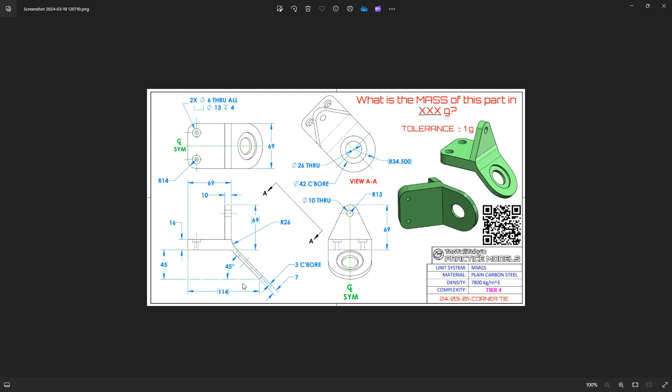This model is fairly simple for IronCAD just because of our positioning capabilities and some of our handle options. It basically consists of just a base piece here on the bottom, and then a vertical piece, and then an angle piece at 45. The tricky part on this one is really just to get this bottom point to be 114 from this location. So I'll show you how to do that in IronCAD, and let me move this over to the other side, and we'll go ahead and build this part.

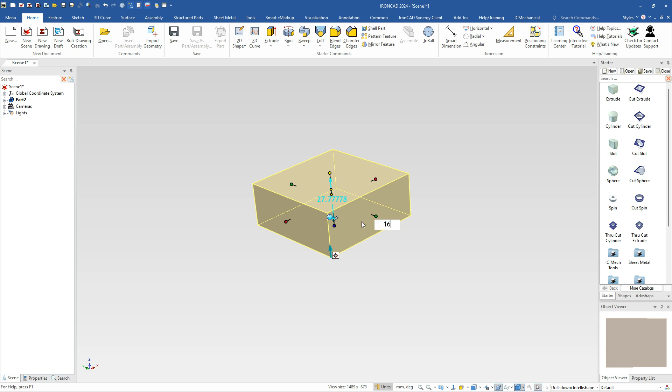Most of these can all be done with standard shapes in IronCAD and also some of our sketch shapes. So I'll show you how this is done. We'll just start with a block. This is going to be our base that I mentioned there, which is currently 69 by 69 by 16 thickness. So just type in those values, hit enter to go through each one of those quickly.

Next, we would have to draw this vertical piece, and this is best done with a sketch. You can do this in multiple ways. What I'm going to do is actually rotate over here, and I actually have multiple ways to do this. We can start a sketch, place it, draw it, position it, or whatever.

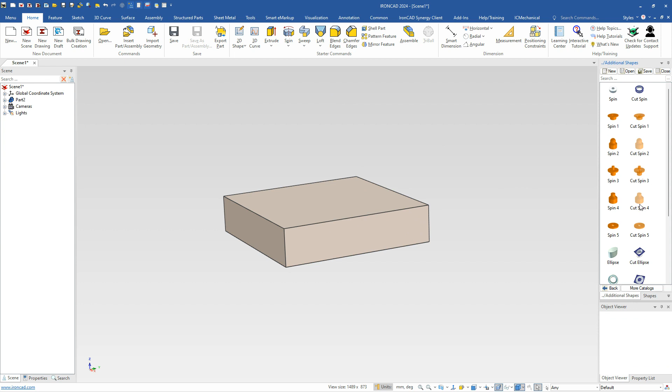But we do have these in our catalogs as well, which I haven't shown in some of my other videos. But if you go to our shapes catalog and under additional shapes, down at the bottom, you'll see two sketch shapes that can be drag and dropped out here as well. One is based on the corner, one's based on the center. So if you want to drop on the midpoint or if you want to drop on the corner, you can do that. Again, this is following our drag and drop capability, so what direction you're going, that it may drop in a different orientation.

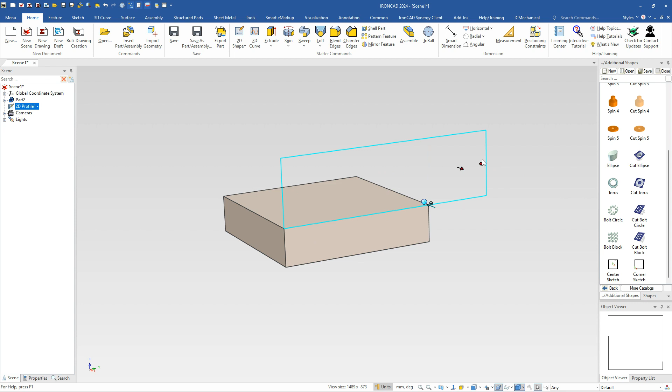But this one's fine. I can just either rotate it around using the tri-ball, or in our case, I can just pull this over. I want to snap there, grab this handle, and I'm going to snap there. So I realigned it to where I wanted it to be. And this, I'll hit the E key to edit the sketch.

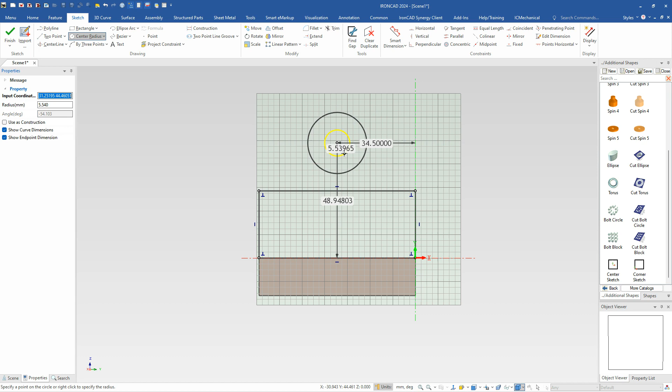In this case, we're just going to go ahead and draw a couple of cylinders out here, and this is going to be in the center of our sketch. And we're going to place this up here, and I'm going to right click and give that a value of, I believe that is 13 for that radius there. It also has a concentric one as well, and I'll just set that as a value of 5 for the radius inside there. And I'm going to set my constraints up, just FYI.

Under constraints, I have some default settings here that it's using, so it's building my constraints as I do this. Next, we can just delete this line, and we can simply just drag these lines up here until we get to the tangency on this guy. So we got a tangency there, and we got a tangency there, and we can just trim off this bottom piece. We could have also added some dimensions on here for constraints.

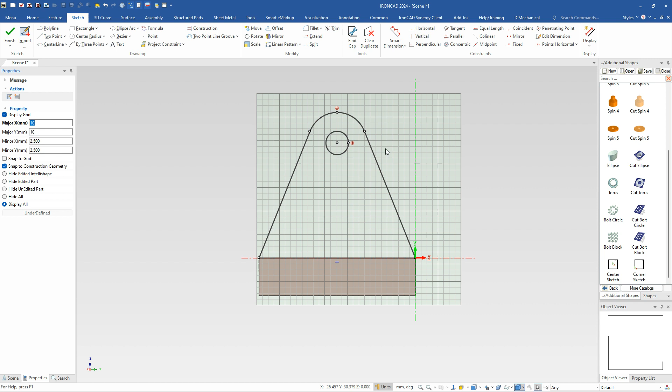So for example, if we wanted to actually have that constraint there, we can select those two lines and tell it to be tangent between those, or we can just use the tangent tool. Either way, I'm just box selecting those two, and it's making those tangent, and I'm going to go ahead and lock down this axis here to be this value to be 13 here.

We do want that to be set, because I'm going to pull this down because we have to set a height from the bottom. So we can either try to do a dimension here. I'll just show you another way because I'm going to use it in two places. So I'm going to go ahead and hit finish here.

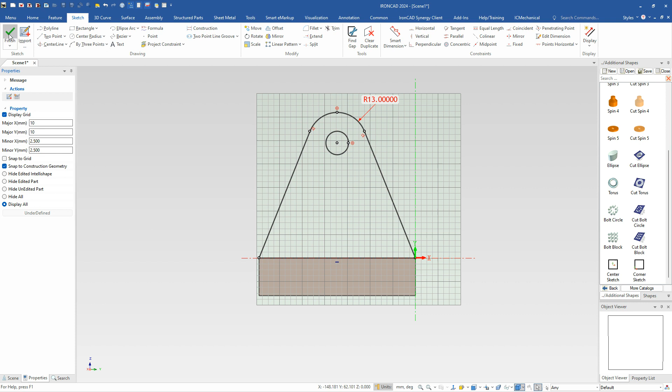And on our sketch handles, we actually have options here to say edit distance from point. And we can just select this bottom edge here, and that has a value of 69. So that will move it down to that value as well. So that's an easy way to do that for us.

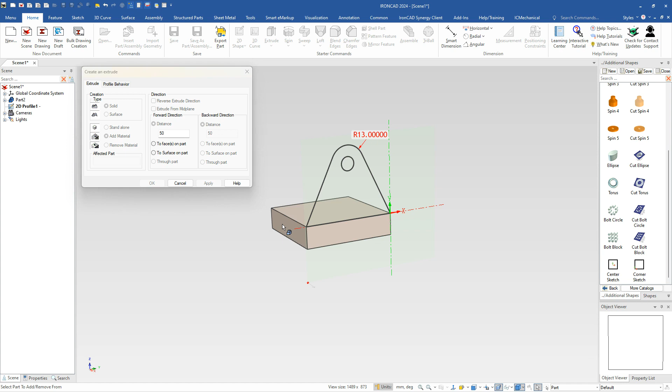Next, we'll just go ahead and extrude this. So you can select on your curve, say create extrude. In this case, we're going to add to this existing geometry here. And that's our geometry we're going to add to. And you can see our direction by the arrow that is pointing, which is the wrong direction. So let's flip that over.

And this has a thickness of 10. And we'll go ahead and hit OK. And that will extrude that out for us to build that shape. So that's our starting shape on that particular one.

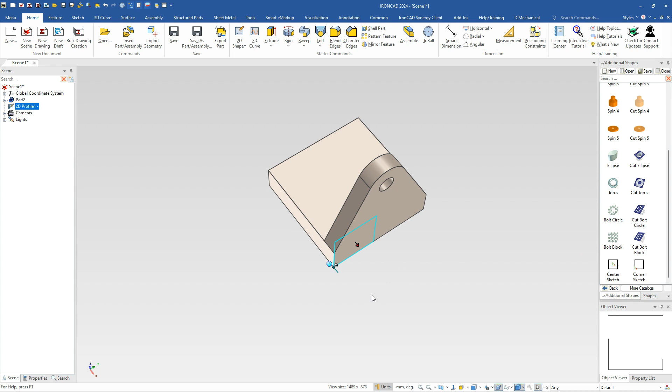And now I'm going to rotate a little bit down here, and I'm going to draw that same item out here again. We can drag and drop that out. In this case, it depends on which orientation that you're at, your viewing rotation on how it drops. So if I rotate this way, drop this direction, notice it'll drop in that plane. So you can change how these things drag and drop.

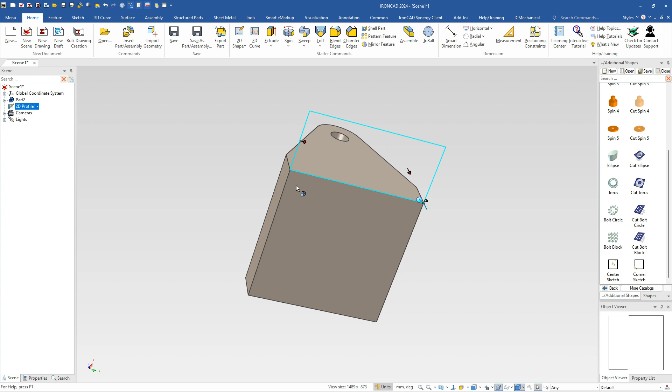So again, you can use the sketch shape up here to do this, or just drag and drop these out and use the tri-ball to move them around however you like. I'm just going to drag this out and snap to the other side here, so I've got these both aligned. Again, I'll just edit this.

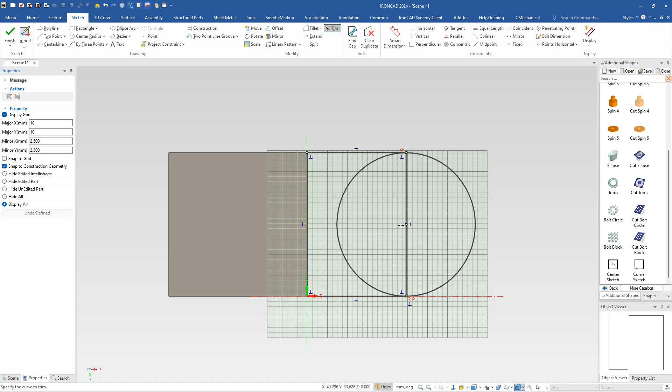In this case, I can just drag this out a little bit, hit the S key, draw a circle here, which is going to be on the center of this edge. You can snap to that edge and draw that, and you get the tangencies there. Then just use the trim command, hit the S key again, and trim off all this extra geometry. So that gives us the basis for our shape here.

We'll go ahead and finish that. So what we want to do here is it needs to be rotated down 45 degrees. That's easy to do; we just lock the tri-ball on and do negative 45 in that case. And there we got our angle that we need for this piece.

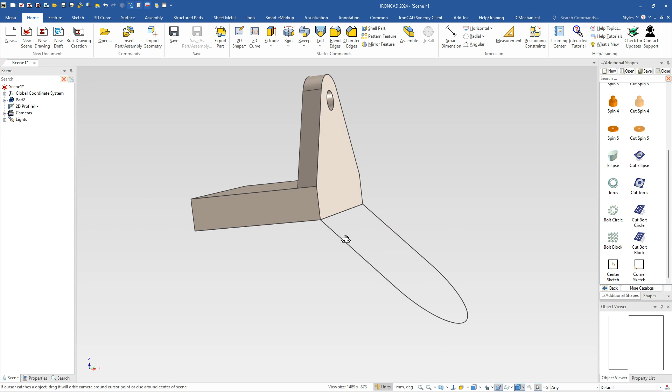In here, we'll go ahead and extrude this, or we can do the adjustment either way. But let's just go ahead and extrude this. We'll select our curve, right click, create, extrude, and this one is going to be added to this part. Again, you want to look at that arrow on the origin here to show you which way it's going.

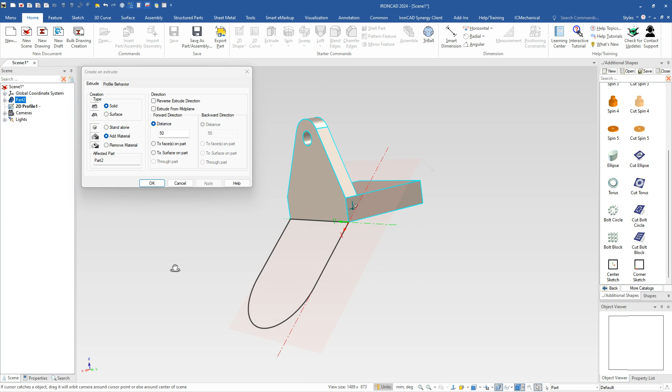In this case, I think I have it going the right direction right now, so we'll set that value to 7. We can flip this later if we need to. Go ahead and finish - yeah, it went the down direction, I'm going to go up on that. So I just right click on that feature, flip the direction, and we've got that.

And then we can just pull this handle in because it's got to be mated in there, since we don't really know what that distance is. So we'll set that, and again we can use the same handle option here.

So this time this is tricky. We want to get this orientation to be parallel to this edge essentially. How we do that is actually right click on these handles and you can change the orientation. In our case, we're going to be parallel to this edge, and now we have the orientation that we want.

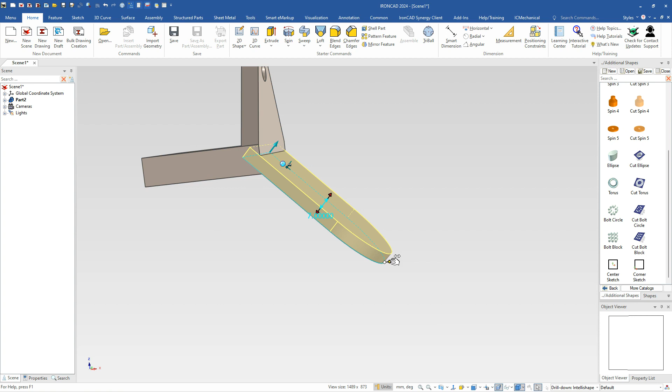We can say edit a distance from point, we're going to pick that edge there, and we want to set that to 114. That will move our curve to be 114 from that point. So that's simply how we can do that alignment there.

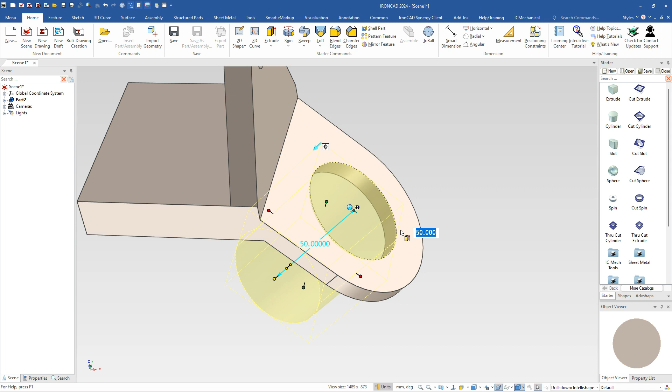Next, we can just add the rest of the geometry here - we have some cylinders to add. We'll come back here and add our cut cylinder on our center point, which has got a diameter of 42, and a depth of 4, I believe. Let me just double check - 3, 3 from the bottom, so we'll set that at 3.

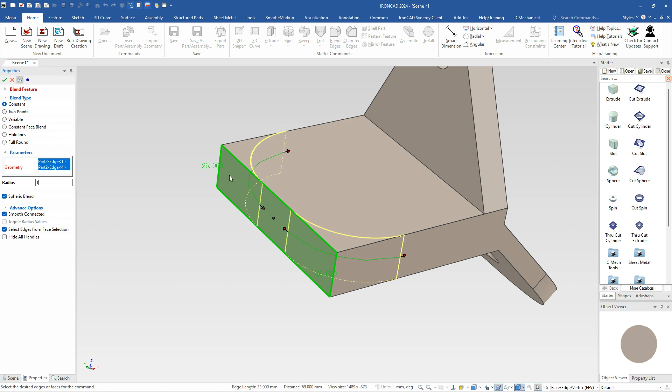And then we have a through hole here that's got a diameter of 26, so that's that end. Next and last, we have to do these here, which is a fillet on the ends. So we'll just select these two edges, right click, go to the blend, and that's got a value of 14 for the radius on those. So we'll set that to 14, hit enter.

And then we can drag and drop either holes to make these counterbores, or it can actually go into our mechanical tools. We have a hole here we can drag and drop onto the center point. In this type, we're going to do a counterbore, and we have a through hole of 6, and the diameter is going to be 13, and the depth of 4 for that counterbore. We can go ahead and hit OK to apply that.

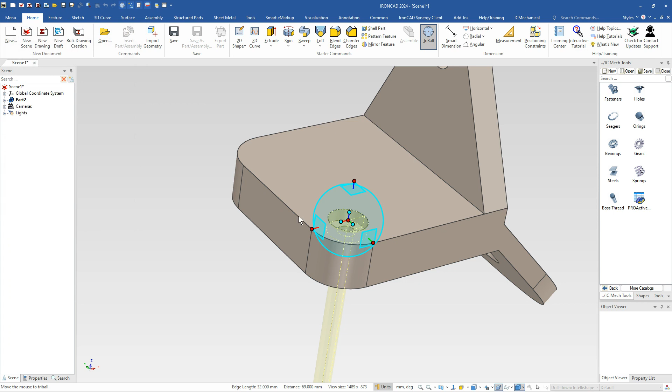And then we can just use the tri-ball to lock an axis and make a link over to the other side here, and we can turn off the tri-ball after that. So that's basically the majority of the shape here.

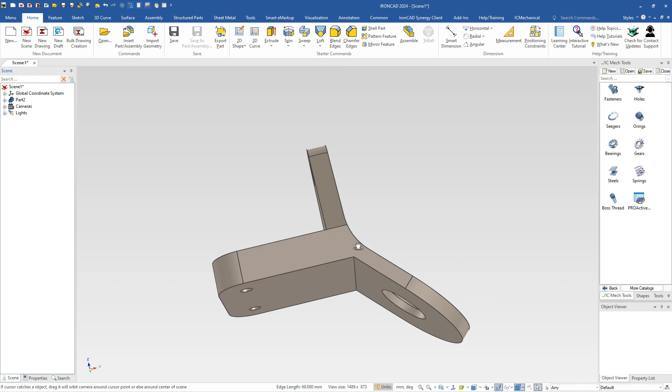The last thing we need to do is add this blend here. In this case, we want to blend that, and it's going to have a value of 26 on the radius. We get OK, and there we have it. That is our shape that we need to be built here.

And just to make sure, you can go to your properties - it has a 7,800 mass density for this setup, so the grams mass is 922 for this model.

So fairly simple to do in IronCAD, just some unique things there on how we do some of this positioning. You don't have to use any datum planes to create this, then a sketch off of that - I'm not even real sure how you get that dimension in there otherwise. Maybe some sort of penetration point, creating a line offset or a datum plane offset and a penetration point, I guess, is how you would do that in other systems, but we don't necessarily need to do that at all with any datum planes here, using our handles.